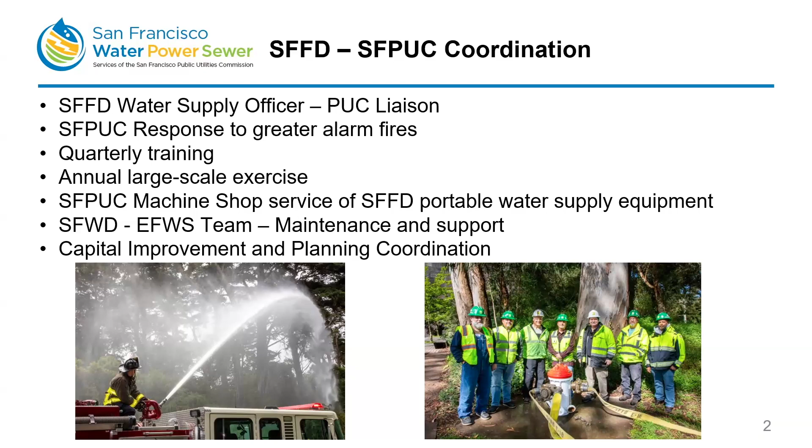We'll get into the infrastructure. Just a little review. You may be very familiar with this, but for those who aren't, San Francisco has an extensive system for fighting fires, and it's well-founded. There's a big reason for it, and we all know it's 1906.

It's an extensive pipeline system, 1,500 hydrants. In addition to that, the 2 saltwater pump stations, the 5 fireboat manifolds. In addition, what we consider part of this system are saltwater suction hydrants along the waterfront of the city, and then more than 180 cisterns around the city, averaging about 75,000 gallons of water, some greater. And then we'll talk some more about the planned potable emergency firefighting water system and what it could bring to the system, especially to the west side of the city.

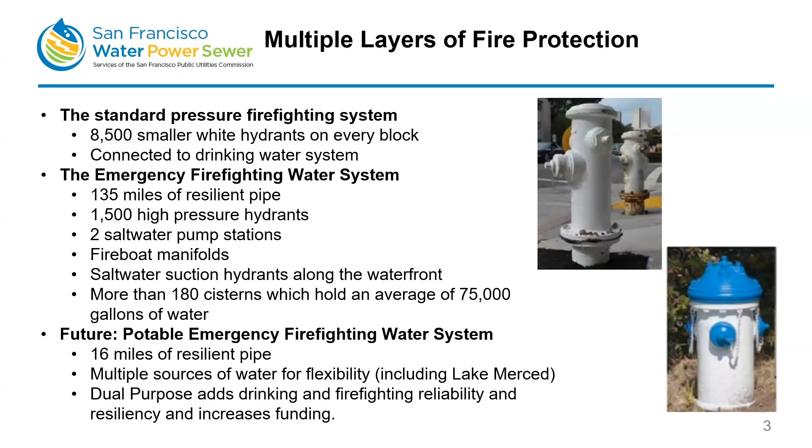Like we said, the primary source here is drink - it is not salt water, it is fresh water, but it is non-drinking water because it is stored in this open reservoir and in these non-potable drinking water tanks. And then we do have the backup source of either pumped salt water from the pump stations or pumped in by the fire boat into the manifold.

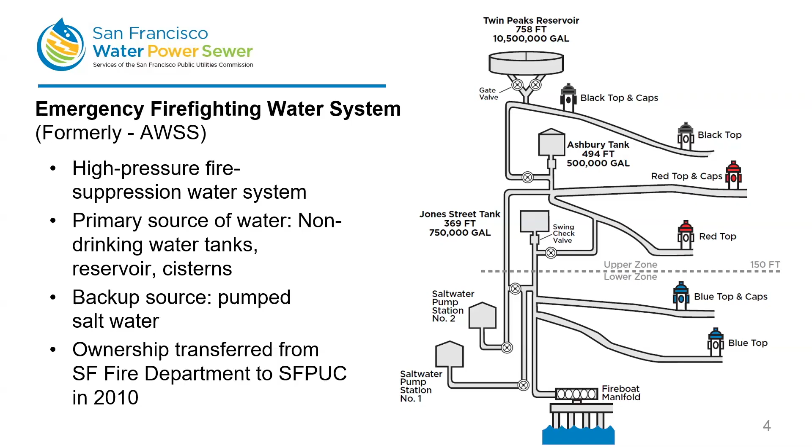As we mentioned before, this ownership of the system was transferred to the PUC in 2010. And they are responsible for the ownership and the maintenance of the system for the benefit of the fire department. There's a map of that existing system, and as John identified, the problem with that system is that it's very focused on that eastern side of the city in the northeast, the high value district that existed after the 1906 earthquake, and it doesn't focus on the west side of town at all.

So to talk about the potable emergency firefighting water system, what is the idea behind this? The concept is it's an earthquake resistant, high pressure water transmission system. So on a day-to-day basis, it's delivering drinking water to the Sunset and the Richmond. It's a transmission line. But then in time of need, valves can be closed, pumps turn on so that then it functions as a high pressure firefighting water system.

It's based on utilizing multiple potential sources of water, including the backup source of water of Lake Merced, over 1 billion gallons of water available in that source. And we're working closely with the PUC to help develop this design.

If you saw the CEQA notice, you should be familiar with this diagram. It shows the basic plan outline of the pipe alignment of the system. As it notes, the green sections are funded by the current ESER and Water Capital Improvement Plan bonds. And the blue sections are in planning and will be underway at future dates. It also details some possible variations in the alignments. And the fire department's advocating for aligning the pipe along Sunset Boulevard, one side or the other. We feel that there's a real strategic value in aligning the pipe with that significant fire break.

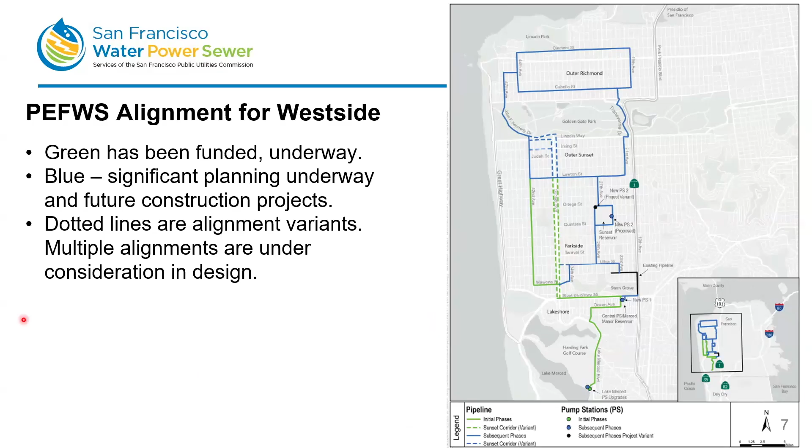To talk about some of the reasons why this ended up being the preferred alternative as opposed to just extending the existing AWSS system or building an additional AWSS - the existing AWSS system doesn't contain enough water to service the entire city. And so in order to utilize it, you would have to add additional reservoir capacity, and that's difficult and expensive.

And so we see this as a way to utilize resources that San Francisco has that we think are adequate in the most cost-effective fashion. So utilizing the existing reservoirs that are in the city, keeping Lake Merced as an emergency backup, using this earthquake-resistant ductile iron pipe, in some places welded steel pipe, so that it's a seismically resilient system that not only provides firefighting water, but can also provide drinking water once the fires are out.

And we feel it's a reliable system based on the modern engineering and materials. And because of the variety of water sources available and all the recent improvements that have been made to the PUC pipeline system, that ensures that water will travel from Hetch Hetchy to San Francisco within 24 hours after an extreme seismic event.

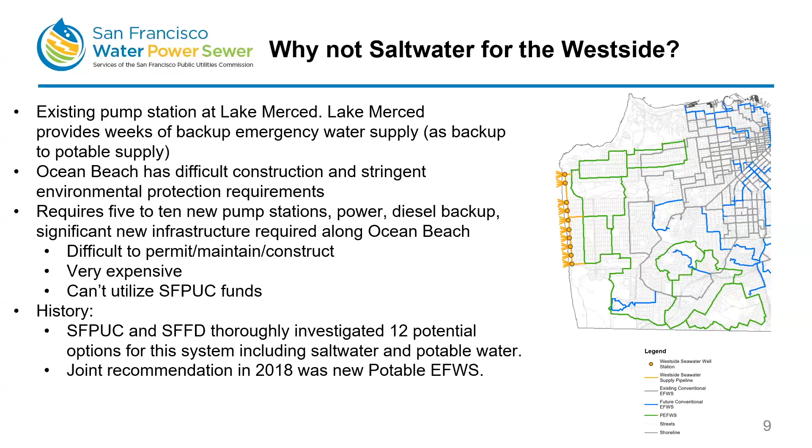In addition, because saltwater stations would be firefighting only, we would not be able to access the capital improvement bonds available through the PUC. Because this is a co-benefit system, there is funding from ESER bonds and also from the capital improvement plan bonds, which allows us to expand the system more quickly than through ESER bond funding alone.

Here's a schedule for the project. Contract A, the section from Lake Merced to almost Stern Grove, is close to going out to bid and award. Because of the CEQA appeal, that will likely be delayed anywhere from 6 months to a year, but we're very close to starting construction on the first section. Contract B, the section proposed downslope in the Sunset Boulevard corridor, is to follow shortly thereafter.

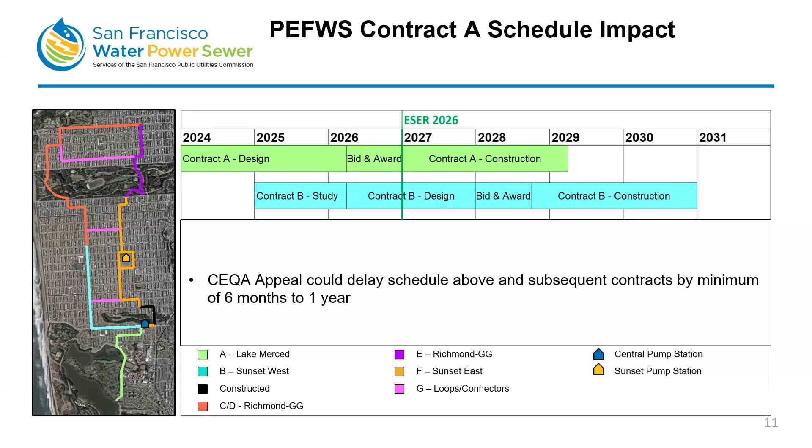That is the end of my component. I will stop sharing.

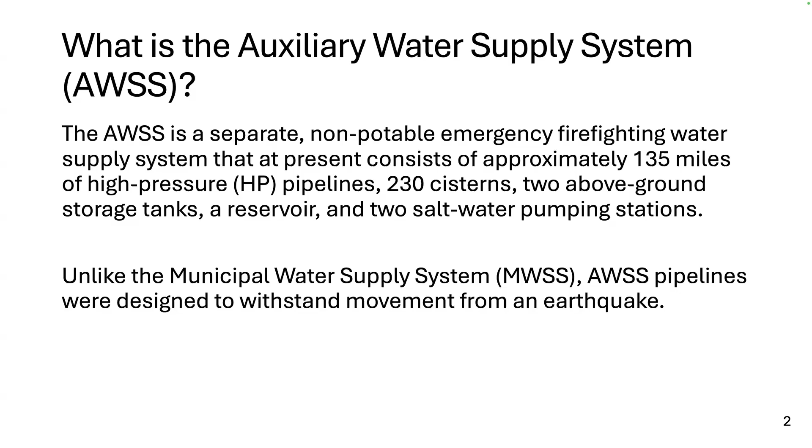It was constructed after the 1906 quake. 80% of the city's loss of life and property was due to post-earthquake fires. These fires converged into conflagration, and it was so horrifying that the residents of the city and the fire department were very committed to putting in this auxiliary water supply system. So they did it within a 5-year period, 1908 to 1913. It covered only the northeast part of the city because that's where the population was really concentrated at the time.

Out here in the outer lands, there really were just some roadhouses and things—Carville maybe was in its infancy. So as was mentioned by Gareth, and probably with better diagrams, this is a gravity-fed system. They actually used the gravity feed to pressurize the system while they were heating the system up with coal. Now, of course, as Gareth mentioned, we don't need to do that—we can use other more modern day methods.

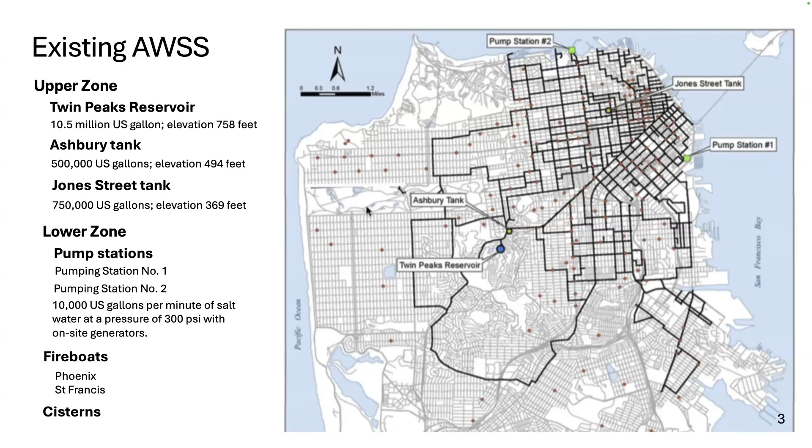This is really kind of the overall system, and you can see the lines here in black, the 2 saltwater pump stations, number 1 and 2, and then the reservoir tanks. And this is what was proposed. All these images are from the civil grand jury report from 2018—the report actually came out in 2019.

So this is really what was recommended: to extend the AWSS, and by doing that, they wanted a pump station at Ocean Beach. We've talked a little bit about the existing pump station at Lake Merced, and then an additional pump station at Hunters Point. So this was really what the extensions and the civil grand jury reports were recommending.

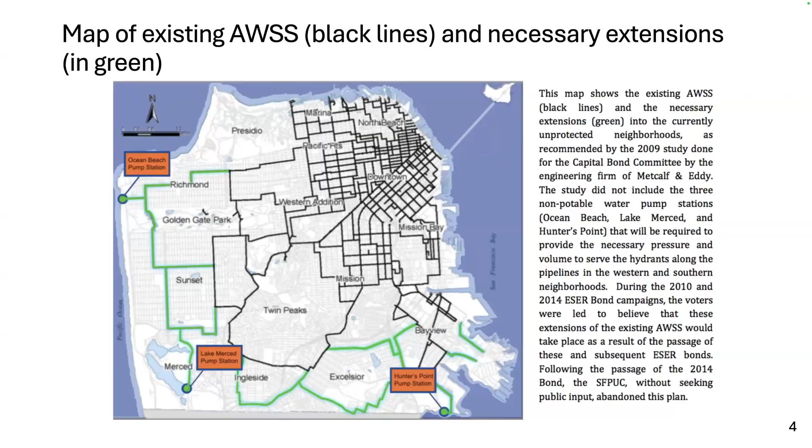So with the current system, really we've got 2/3 of the city, 9 out of 11 districts, that have areas not protected by the AWSS. This is, I think, an area that leaves the city pretty vulnerable to post-earthquake fires.

This is a breakdown of the AWSS, the high-pressure hydrants and miles of main by district. District 4—the numbers are actually wrong; those are actually on the other side of 19th, so they're technically in District 7. There really are none in District 4, and no miles of main.

And then I think, Gareth, you had a nice picture in yours as well.

So the high pressure hydrants have colored caps. They're fatter and more seismically stable. The color of the top indicates which reservoir or tank is feeding them. The skinnier ones are part of the low pressure municipal supply system.

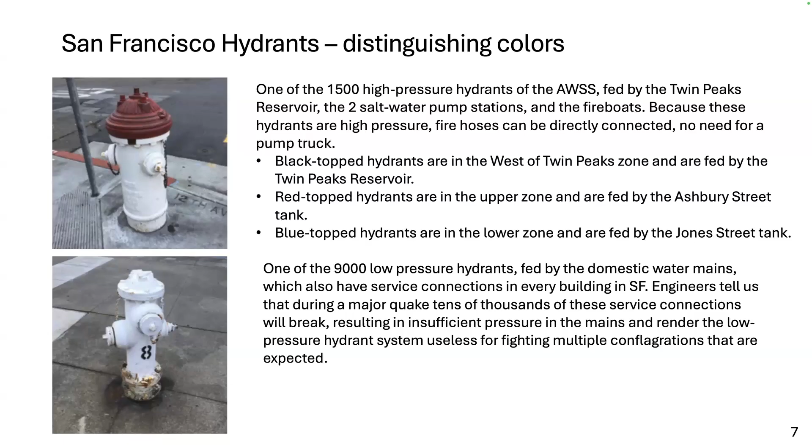As we mentioned, in 2010 Mayor Newsom transferred the AWSS from the fire department to SFPUC. This was also the year of the first of three earthquake safety and emergency response bonds. These are voter-approved bond measures, passed in 2010, 2014, and 2020. Out of this bond money, $312 million was earmarked to expand the AWSS across San Francisco.

As I mentioned, there were two civil grand juries, one in 2003 and one in 2018. Both recommended that the AWSS be expanded, and in the 2019 report they said to do it urgently.

One of the things we're concerned about is that in the 15 years the PUC has owned the AWSS, they haven't extended a single mile of main, nor a single high pressure hydrant. Compare that to when the fire department owned the system: between 1913 and the year it was transferred, they added a total of 757 hydrants, an average of 117 every 15 years. There were 887 hydrants in place in 1913, and 1,644 as of 2010. That's 757 hydrants over 97 years. Looking at what's happened in the last 15 years with over $312 million, we haven't added a single hydrant to the system.

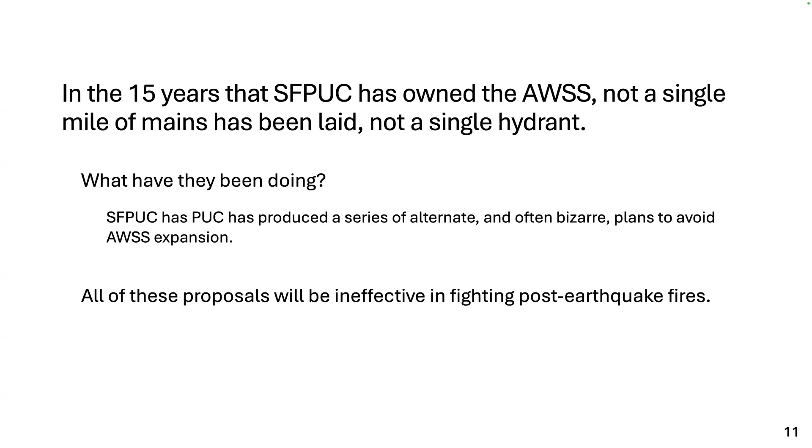I think in the bond language, what people were voting for was this AWSS system expansion. Looking at the history of what's happened and some of the proposals from the PUC, some of them have quite honestly not given a lot of confidence that they're effective, including a proposal in 2016 to have flatbeds of miles of large diameter hoses that would be driven into the city by NERT volunteers. There's been a number of proposals over the 15 years that haven't really given the public confidence. I'll speak for myself: it hasn't given me confidence that the proposals generated are solid.

One of the reasons I'm against the co-benefit, dual system approach is that you're limiting your water supply by using potable water. Someone asked about sharing of the water. That's actually in State Water Code 73503, which states that under a regional disaster, the water in the city's three terminal reservoirs must be shared equitably with the 27 wholesale water customers on the peninsula. So we don't have full access to that water; we have to share it with other ratepayers along the peninsula, even in times of emergency. So one issue is the limited amount of water because we're relying on a potable water system, whereas we're surrounded by the biggest body of water on Earth, just to the west of us.

So your options to replenish your water are to get it from Hetch Hetchy—I've got a diagram here. It's 167 miles and would take about 24 hours. It crosses three major fault lines, actually running along the San Andreas Fault for about 24 or 25 miles. We have no way of knowing whether that system will remain intact in order to replenish water for firefighting.

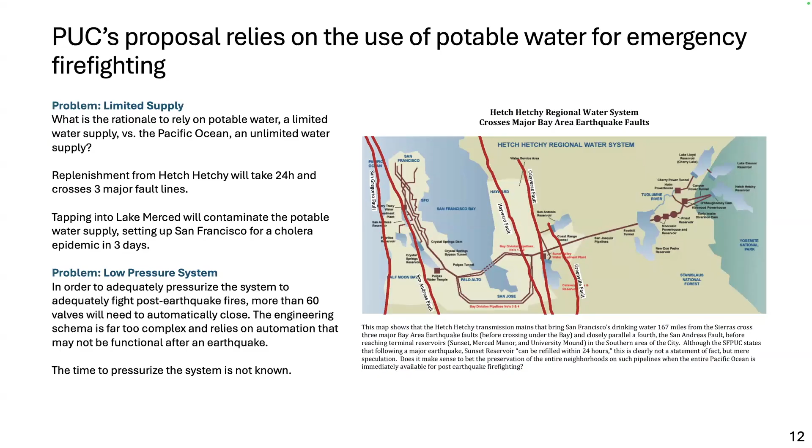Okay, so that would be 26 fires you could fight out of cisterns? Because you need 2, right, per cistern? Maybe. So that was one thing. So I think those are some of the concerns that I have with the system.

And then this is kind of about the PUC. So there was a couple of other things I'm going to comment on. One was the cost effectiveness. In 2010, the PUC had Metcalf and Eddy, AECOM do an assessment. They put together an estimate of what it would take to expand AWSS, and they came up with $600 million in 2010. In 2025 dollars, that's $892 million.

And I was thinking, and I was looking into that a little bit further while you were talking. I'm looking back at the meeting minutes of the San Francisco Public Utilities Commission Citizens Advisory Committee. These are the meeting minutes from October 21st of 2025. And Josh, I think hopefully you can clarify this for me a little bit, but there's something in the minutes here that says you responded that the $4 billion was an underestimate at the time and have seen a massive inflation since 2020. So it will be more like 8 to 10 billion these days.

And there are a lot of ideas that are not fully developed in that figure. Can you clarify if that 8 to 10 billion is just for the current project that was put out for the Sunset and Richmond, or is that in total for the two-thirds of the city that's not yet covered? That's for the entire city, including areas not covered, as well as upgrades to the existing system.

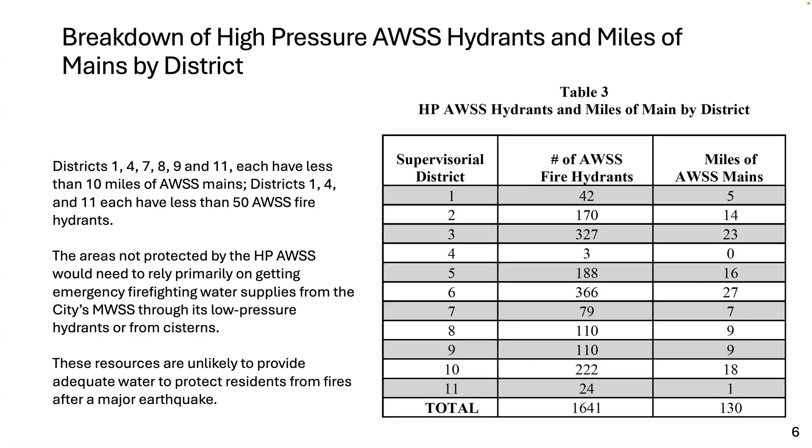Okay, and then can we talk about speed of project a little bit? So in the civil grand jury report, they were estimating, and I think this was also true in the Metcalf and Eddy proposal, that within 10 years, the AWSS could be expanded at that time at a cost of 600 million. If I look at the 2026 bond language, they're estimating that, contingent upon getting additional bond monies passed, it would be 2040, and that's just for the proposed project that covers the Richmond and Sunset. It does not cover other parts of the city that currently don't have AWSS or an alternate system. Is that correct?

That's correct. Okay. So it's really dependent on how quickly we get the next round of ESER bonds and how much funding is directed towards the system in those ESER bonds, which is also a policy issue.

Okay, so I guess as a voter and a taxpayer, my concern is — let me back up, I'll frame this a little bit differently. In reading through the 2010, 2014, and 2020 bond reports, the decision of how to manage the money and how the projects move forward is ultimately the decision of the department heads of PUC, DPW, and the fire chief.

And from 2010 to 2020, two of those players were Harlan Kelly and Mohammed Nuru, and both have been found guilty of breaking public trust.

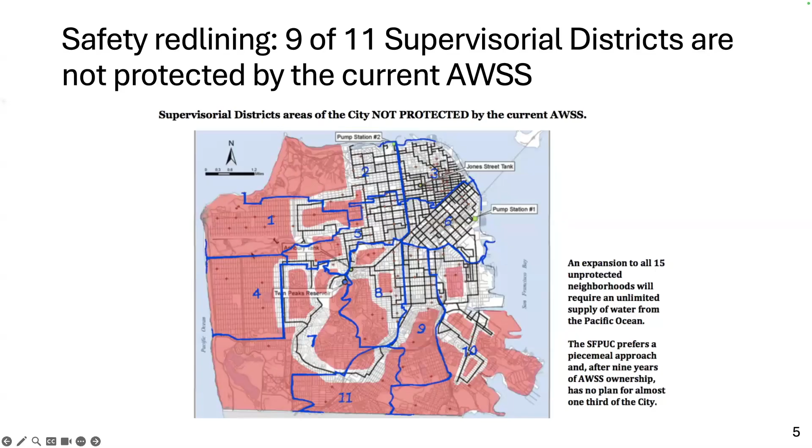So there has been good progress, and really this team has gained a lot of momentum since I've come on board. My position, I think, was part of that gearing up to build the west side. And we have a large team of consultant support - geotech experts, pipeline experts, automation experts, traffic, construction managers, public outreach. We've done a ton of work and we're really geared up to make progress.

One thing I'll say is that regardless if you use saltwater or freshwater, we need these pipelines in the ground. From our perspective, the sooner we get the pipelines in the ground, the better chance we have of protecting people and providing water supply. That's been our mission, and we get a lot of pressure from the supervisors to get it done faster. We are always pushing our team and exploring solutions to accelerate our schedule.

So that's kind of what we've been up to since I've been here, and we've gained a lot of momentum and we're really making great progress. From my perspective, I would just like to see more ESER bond money so that now that we've got this team and we've got the wheels spinning and the momentum going, we just want to get pipe in the ground. And as soon as we get pipe in the ground, we have gravity flow.

And we're looking at the pump stations that we can get even more money to get higher pressure. That's even greater benefit, but we don't need that for great fire protection - that's just additional bonuses on top of the pipe in the ground. So that's kind of how I see things, which I know is counter to your perspective, but that's what I see, and I'm very passion-driven to get this done.